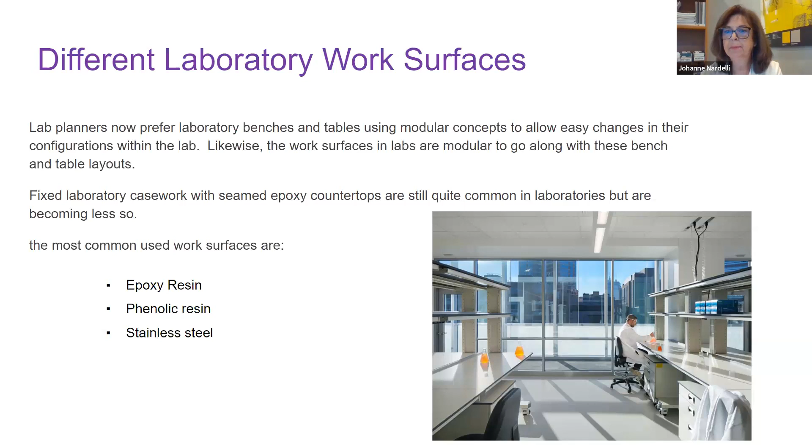What to consider when you're choosing a lab work surface? There are a few things that are important to think about.

Chemical resistance, depending on what chemicals you'll be using, abrasive resistance, heat resistance, impact and moisture resistance, bacteria, type of use, furniture style, and cost. So there's a lot to think about before deciding to go with one or another.

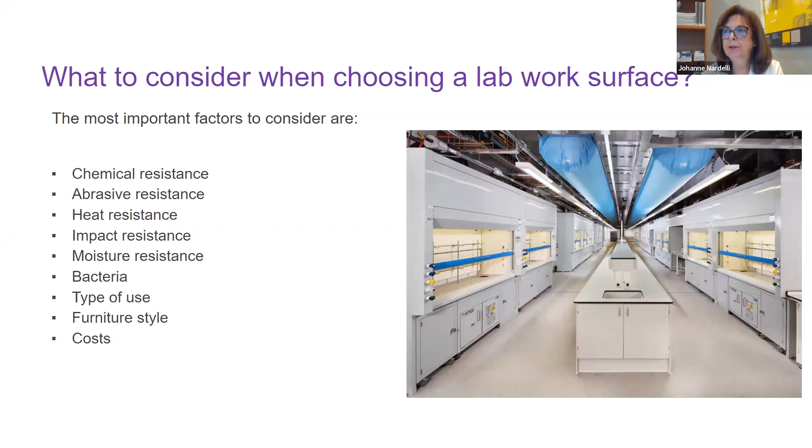I'll just do a small summary of epoxy resin. Epoxy resin is the most used in labs in North America. It's been used for over a few decades, and that was the standard in North America, even though phenolic is probably the most used worldwide.

Epoxy resin is widely used in chemistry, biology, pathology, high school, and university labs. They're very hard, the surface is very hard, and it often relies upon structural support with a fixed casework.

Typically specified at 1-inch thick all over, very heavy, about 12 pounds per square foot. So if you think about it, a 72 by 30-inch work surface, 1-inch thick, will weigh about 165 pounds.

The lead time for these work surfaces is pretty long, mostly between 12 and 16 weeks, and they can be prone to scratching.

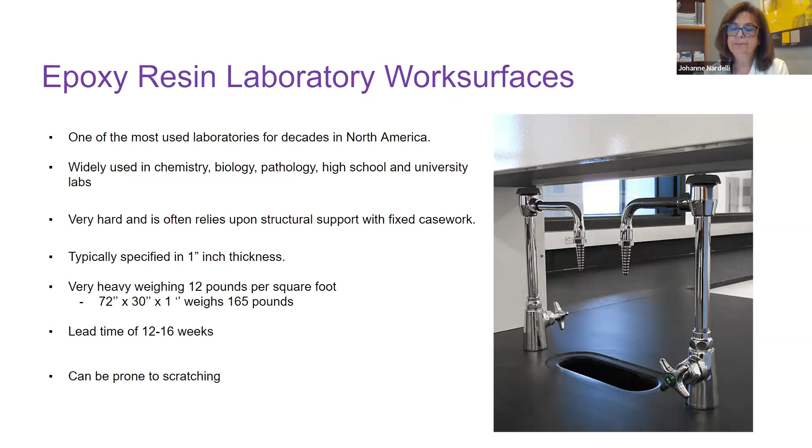Stainless steel lab countertop. Stainless steel is ideal for sterile environments, including biomedical, pharmaceutical, and food development. They're ideal for clean rooms, hygienic and antimicrobial properties.

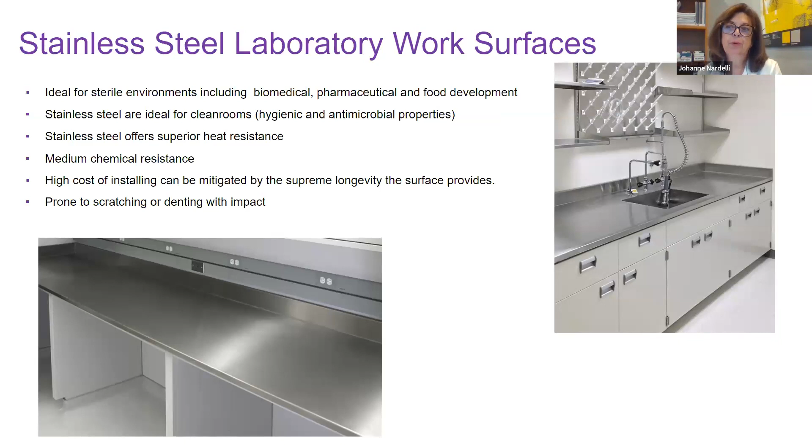It offers superior heat resistance, medium chemical resistance. High cost of installation can be mitigated by the supreme longevity of the surface provided, but it's prone to scratching and denting with impact.

So this is why we'll be talking to you about compact HPL. In North America, it's known as phenolic resin panel most of the time, or compact HPL. There are different names, but it's basically the same thing.

Unlike traditional laminate or plastic laminate or HPDL, depending on, HPL is a homogeneous, monolithic, self-supporting panel that will not delaminate. Pretty important.

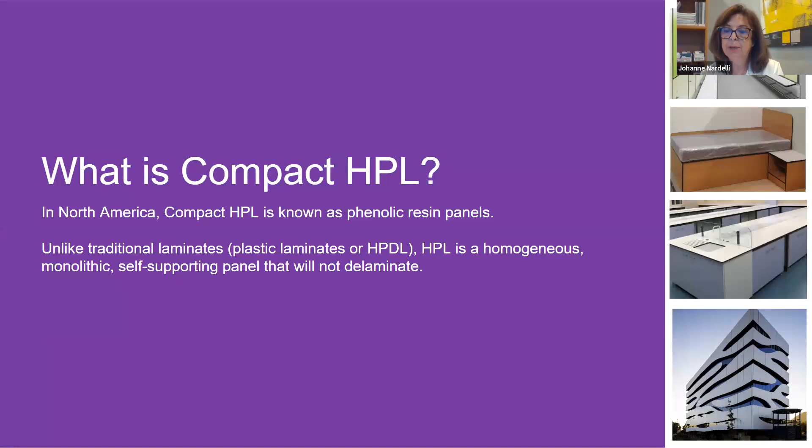The panel consists of, on the top, an acrylic-based decorative work surface. Then the core can be done with natural fiber or with kraft paper, and this will be soaked in a phenolic resin. At the bottom, you'll get again an acrylic-based decorative surface or a backside, because it needs to be balanced.

The surface that we're using, that we will promote, is a surface that is cured, meaning it's going to be harder, before the pressing process, which is done with electron beam technology. It's basically a non-thermal curing method that uses high energy electrons, and the result is a very dense work surface, non-porous, with enhanced properties.

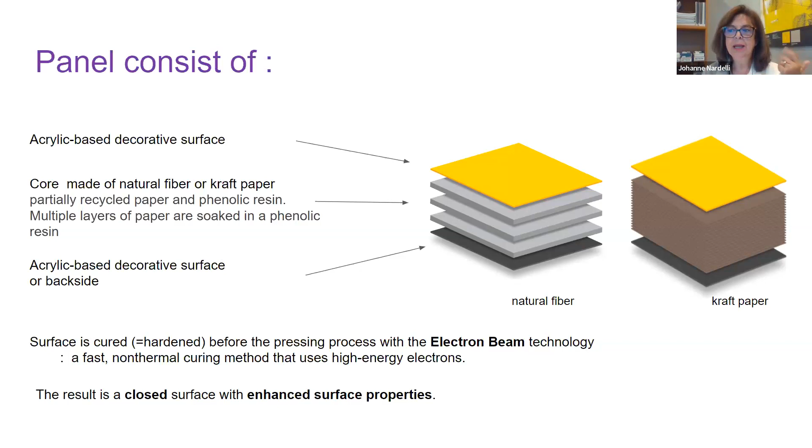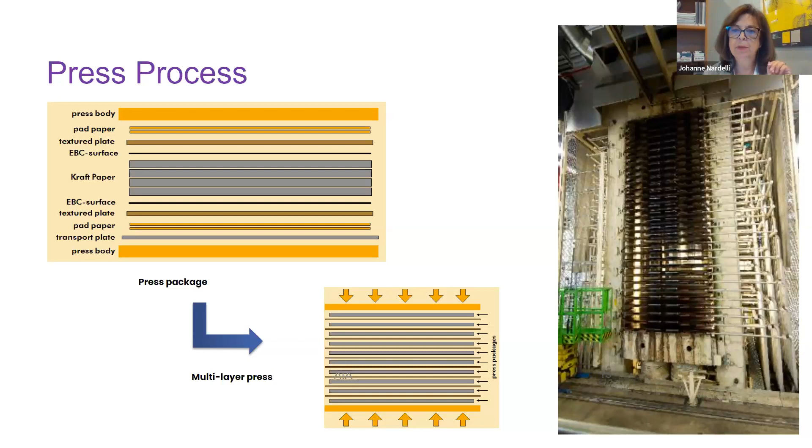This is how it's being done. These are the kind of presses where they will put the material. As we've seen, there's the surface, the core, and the backside of it, and all that will be pressed in a very strong heat press. So it's going to become one homogeneous surface, as we said.

The nice thing about this EBC technology is that it allows for very smooth machinability. You can cut it and do that on-site very quickly for installation. It has a very long life performance, high quality stability, and it's also suitable for exterior use, so it's UV resistant at the same time.

Very low maintenance, easy to clean. Very high chemical resistance, and very high impact and scratch resistance. Not saying you cannot damage it, but it has very good resistance. It does not support bacterial growth, and it is also suitable for contact with food.

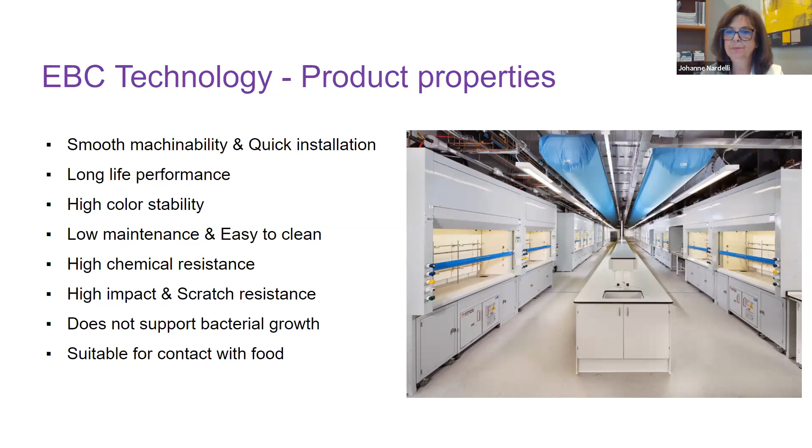Am I going too fast? No, you're doing great. Yeah.

So, design flexibility and durability. It comes with multiple colors, has a variety of textures because we're talking about HPL, and it's the same thing even for wall lining or facade.

Single or double side color possibility. Multiple panel sizes allow efficient use of the panel. Different panel thicknesses, lightweight in comparison to a lot of other materials, and possible to machine with common tools.

We see here that we have 8 different colors, plus one with a texture, with Trespa. Black, white, and gray are the most specified colors. Whatever the color is, the price is the same, there's no upcharge. And we will also recommend going with 3/4 inch instead of 1-inch, it's as strong and it's lighter.

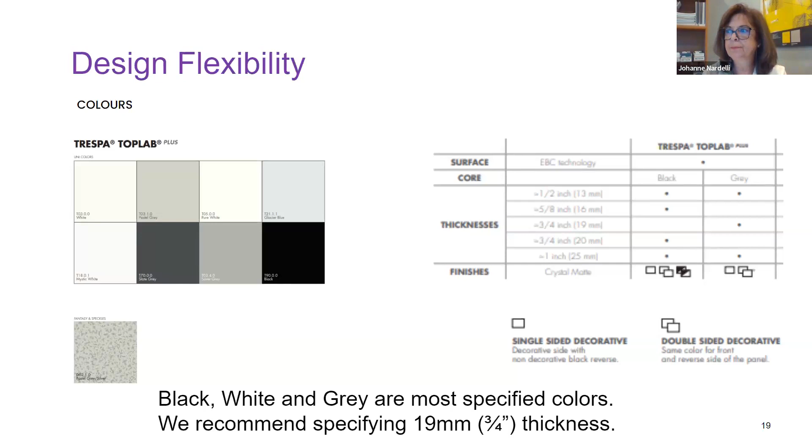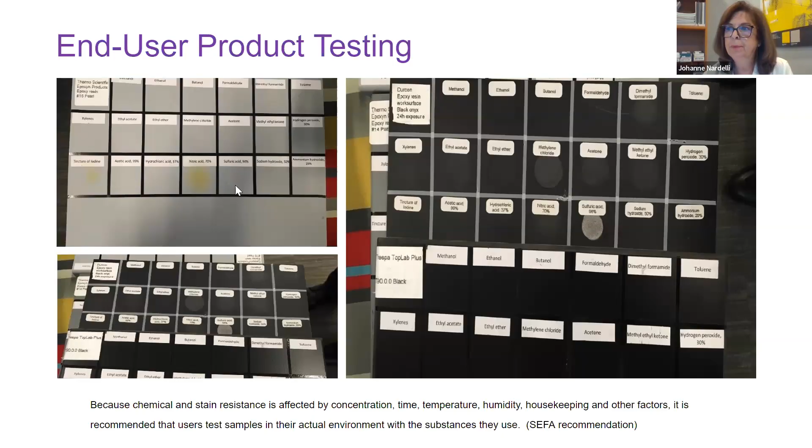Is this something you worked with the owner group on? Are you okay with providing samples? Yes, it's something we offer architects to make sure whatever they choose is tested, and we offer that to the end user too because they have their own chemicals. There may be a chemical they use that hasn't been tested, but the best way to find out if it works is for them to test it. I think it makes everybody comfortable using it, because you know it works. You test it—it's not just paper saying we're so good or so nice.

Circling back to the LEED conversation, one thing that came up on a recent project was what LEED points this actually contributes to. We can get the list over to you or the architects as part of the follow-up, but I think it's up to 4 points—all the materials points. As we know with LEED, after years of understanding it, one product doesn't necessarily just give you a LEED point, it contributes toward the overall point total. So this contributes toward, I think, 4 different LEED points.

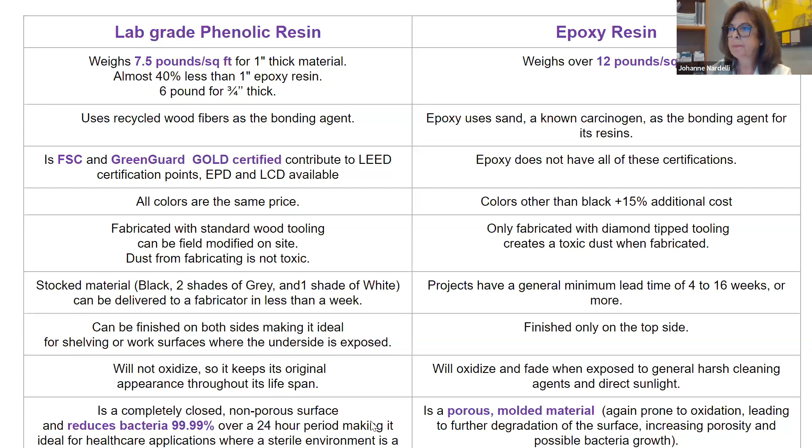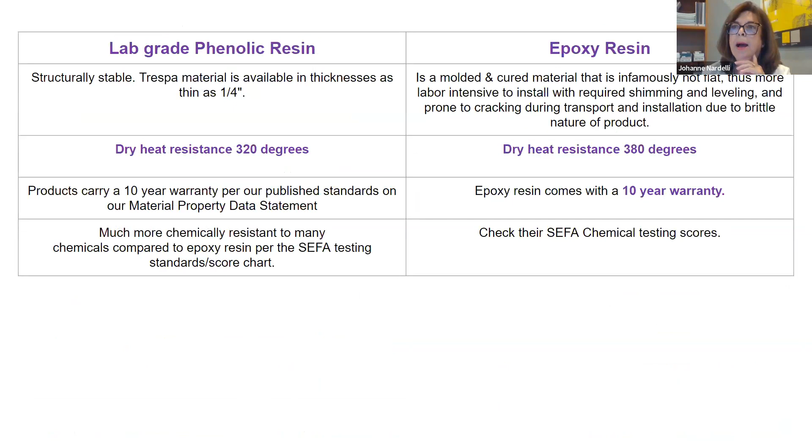The phenolic can be as thin as 1/4 inch, maybe not for a work surface, but for a different application, which is something that would be very hard to do with epoxy because it's molded and it would be too fragile and it might crack.

We often hear also that the epoxy is much more resistant for dry heat, which is true. They go up to 380 degrees. The phenolic will go up to 320 degrees, which is less.

But if we think about the lab, which we don't see much anymore, the little burner with the flame in it, the heat of that burner is probably around 1200 degrees. So it's so much higher than 320 or 380. Both of them will be damaged if exposed to it.

Both products have a 10-year warranty. They say it's much more chemical resistant for many chemicals compared to epoxy resin, based on the SEFA testing, but I don't want to say which one is better and which one is good. I think you should check with SEFA chemical testing for epoxy.

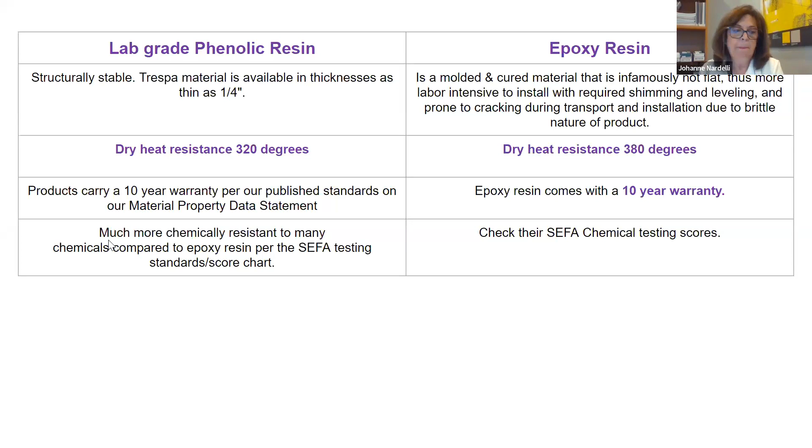One thing that highlights to me is the fabrication that's available with it. There are so many different things you can do with the product, not just the counter. Like you said, shelving, being able to fabricate it on site with standard materials and not a special diamond tip tool.

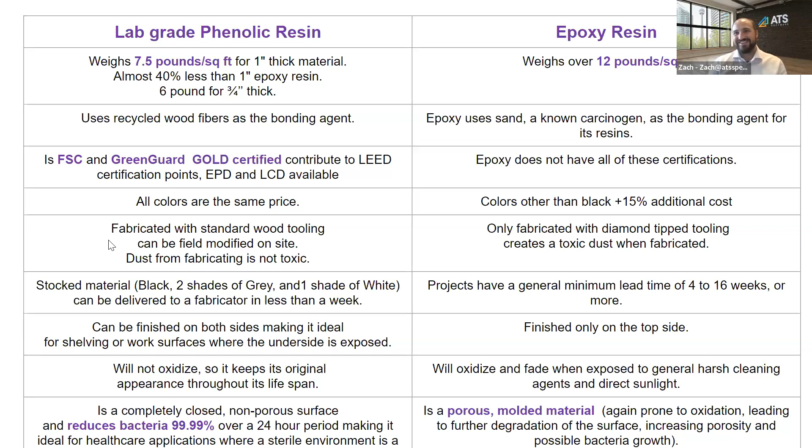Good. Just want to show some application.

It can be used for vertical and horizontal application. So obviously we can do some cabinets. Not that we are into that business yet, but it can be done. And vertical can be done also for

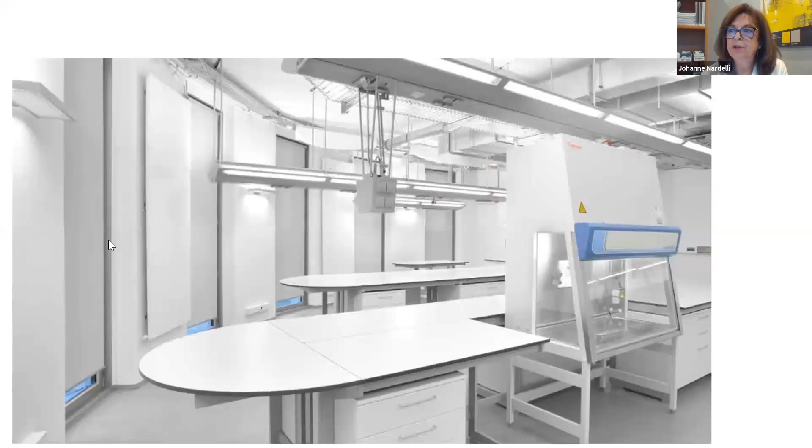horizontal for shelving. We see here some examples. We can do different shapes easily that can almost be done on site. Can do something different if the architect wants to do something a little bit different and more inspiring.

This is into a scientific lab in Quebec, at Laval University, in the science pavilion. So what they wanted to do, they did it as a vertical on the wall, and we engraved it to show 4 different researchers' faces for each floor. Pretty interesting, gives a place for ideas and creativity.

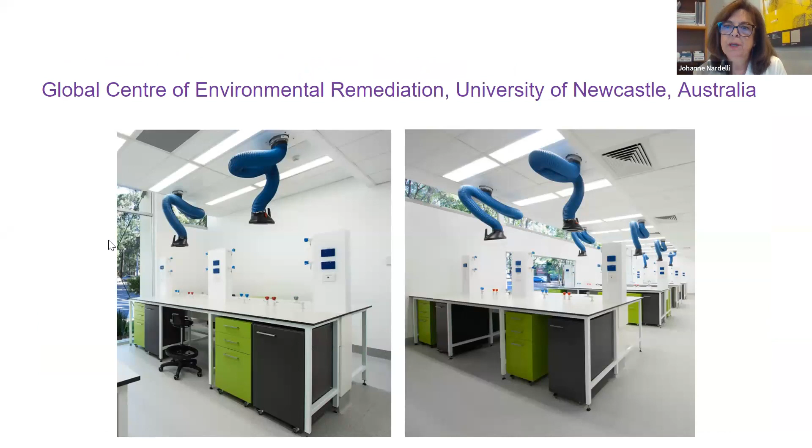Lockers can be done with different colors. It can be interesting for that as well. And a few pictures just for you to get inspired of what can be done, for different labs that were done all in white, or white and different colors. We see a lot more white tops, pretty inspiring, more bright. It seems to be something that people are looking for, and they want to be close to the window if it's possible and get a lot of lighting.

Again, we see it with light. I think this one looks white, but it's a light gray, and you see different colors for the casework. All white, and you have different things on it. And work with black counter, colored casework. Things that we've seen more on a regular basis, with a wood finish. It's not real wood, it's a wood color or wood decor with a light top.

And this completes the presentation. Is there any question? I'm here for that.

We'll keep an eye out for any questions, but I'll also highlight, I do love the variety of colors. I think one thing that stood out to me on one of the sessions we did, a year or two ago, for healthcare design and hospital design, was the fact that, specifically for children's hospitals but all hospitals in general, getting away from the standard, more institutional look and into colors and keeping things more playful and getting it away from institutional had a correlative response with recovery. And especially in children's hospitals, they really look for something that makes it a more positive environment, because it does provably show that they recover quicker and more commonly in those environments. It's a pretty interesting thing, how much your environment plays into your health. So I love that aspect.

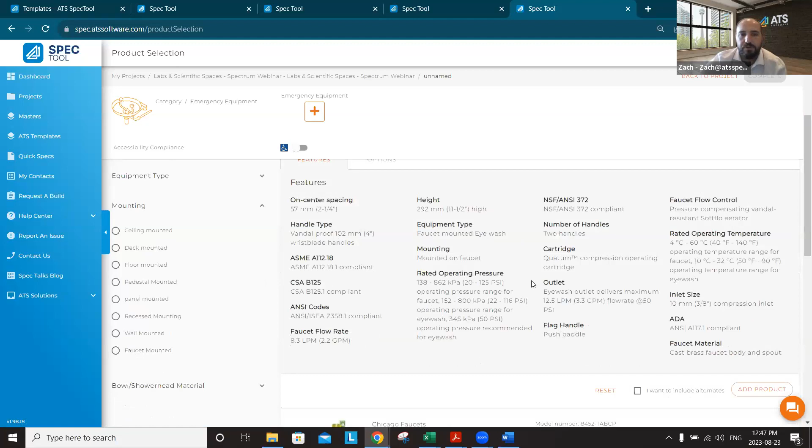So here you have a two handle with an eye wash, or a sensor operated with an eye wash. These are newer products that also have an option for a mixing valve built in. Great products that you can learn more about by hitting the spec sheet and downloading it, or just expanding it to review the options and move on from there.

I'm going to jump back to the project to show you another way to fill out your product, using this labs product master that I built earlier. If we help you get set up with a master and you have a number of these projects coming out, we don't need to select that particular emergency fixture. We can go through and select all of these various sinks - deep bowls, chemical resistant sinks with serrated nozzle faucets, different faucet options, different emergency options.

And we can say, I don't want that one or that one, so I'm just going to copy this. Of course, I need my acid neutralizer, backflow, and all the various products you may need. This may not all be in your scope, but you can select what you do need and leave the engineer to select what they are selecting as well. In fact, you're even able to share the project with your engineer on the system if you so choose - really, it's up to you.

I'm going to search for that project file that we created earlier. We're going to see our labs and scientific spaces. I'll hit the additional equipment I set up earlier, and I can copy it in. I could copy this into a new project, or copy this into a new master - all sorts of integrations that you can use.

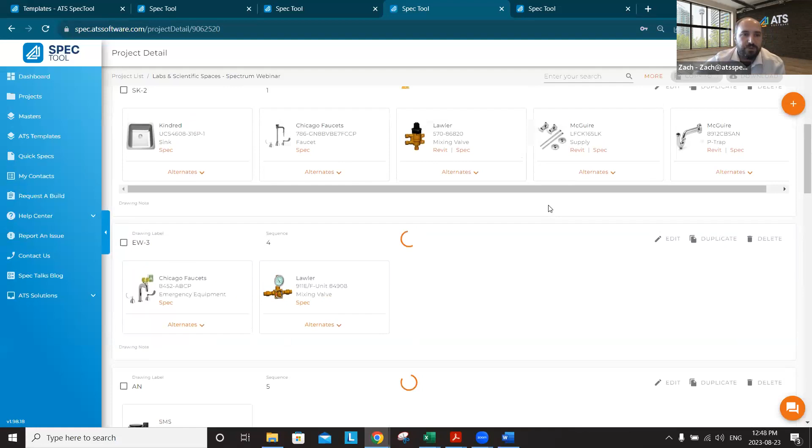Once you're done, let's say we want to now download this, but we want to include our locker. I can even copy this over to that same file, so I can put my locker directly into this lab's additional equipment. Then I can download everything. I hit download, and now you can download the configured selection.

Not just the base manufacturer spec sheet, although of course we include that as well - you can get the manufacturer spec sheet package right here. You get a configured written spec, or fixture schedule in Excel, or submittal, or product brochure, or Revit, or the 3-part specs. Lots of different formats that you can download just by hitting generate documents.

I see a couple questions coming in, and I'm also seeing I'm starting to run a little bit long on time. So again, I mentioned I downloaded all this earlier just to make sure that I'm keeping on pace.

I'll pop over first to our spec sheet package. I mentioned a few times the manufacturer spec sheet - now, of course, you can get that. You can get a table of contents with all the products you've selected, and all the different spec details.

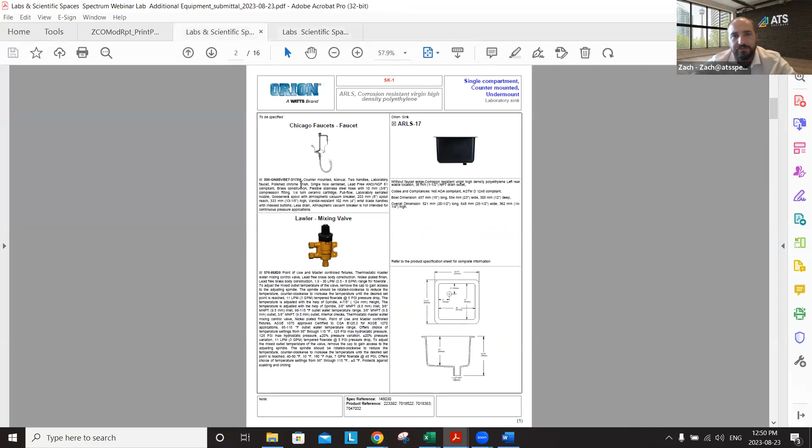You can get the configured product selection like we talked about - there's our locker with the configured clean room information on it. You can get the written spec in various formats, and of course, everything's open and editable.

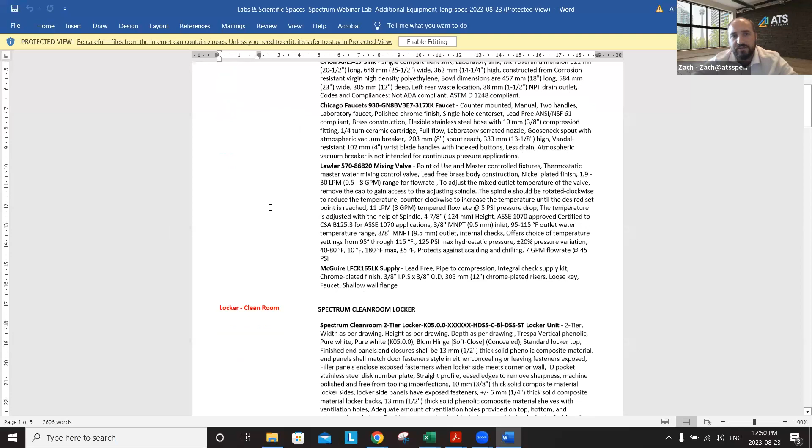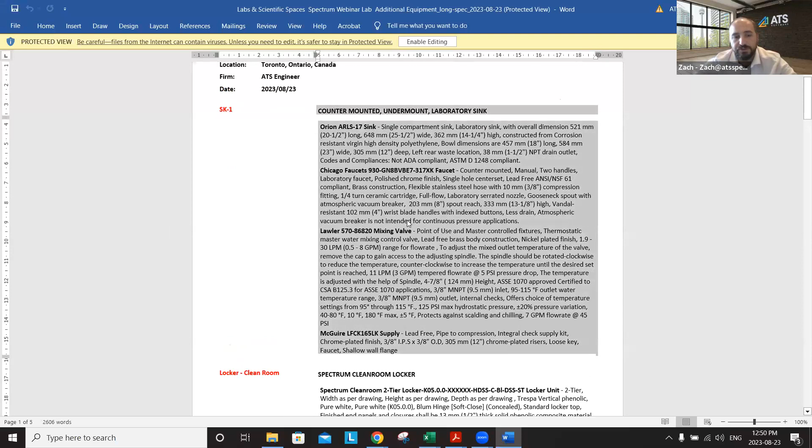So let's say you're choosing a different sink - you could, of course, delete this if needed. If you want to copy everything over into your internal written specs, you can do so there as well.

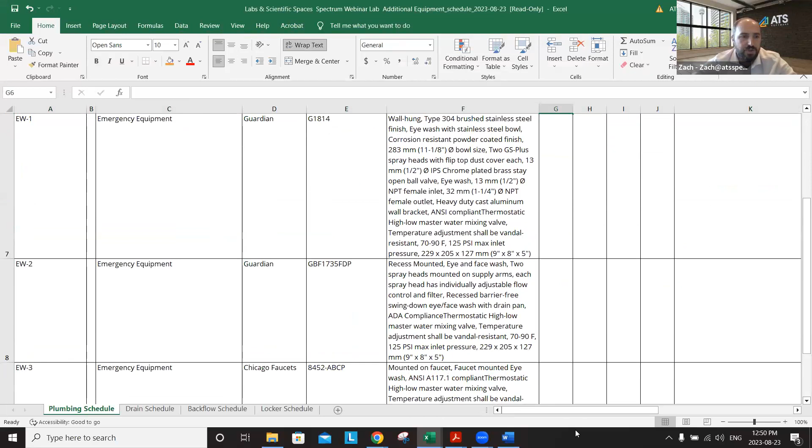And of course, finally, I mentioned the schedules in Excel. You can see here at the bottom we have a plumbing schedule, we have our drain schedule, we've got the backflow schedule and our locker schedule. So you've got different schedules, not just one, and the tabs at the top are all configured to the type of schedule you're using.

So that's everything in terms of the ATS spec side. Of course, we talked about a bunch of different products today, but I think there's a lot of details shared. Is there any final questions coming in as I was going through?

Zach, I just had a question. There were a number of questions that came up in the Q&A session. Do all participants see those questions and answers, or are those answers only directed back to the participant who asked? For example, there's a question about our Buy America products—can you select for Buy America products in the spec tool? And there were a couple other questions on price. I just don't know if the answers go to the broad group or just to the person who asked. I think it'd be great to reiterate any of the questions, share those with the crowd.

Okay, there was a question about the relative pros and cons of epoxy versus phenolic. Can you help us understand a cost difference between the two? In our experience, we normally recommend a 3/4 inch compact phenolic top. That should come in installed about 15 to 20% lower than epoxy. We always hesitate to give a number because really the price the GC and ownership pays will depend on local labor rates. So if you've got a local budget you use for epoxy, 15 to 20% lower than that should be a safe number. And then there was another question about whether a download is available for the spec tool.